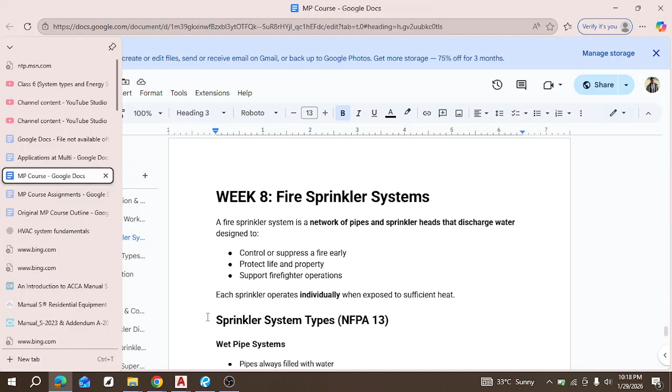Right, this week we will be talking about fire sprinkler systems. Right, it's very similar to plumbing systems, but it just has some extra details, very important details. Right, and it's to be able to effectively fight against fire.

Right. So a fire sprinkler system is a network of pipes and sprinkler heads, right, that discharge water to control or suppress a fire, and that in turn protects life and property, and then it also supports firefighter operations, and it's usually automatic, right? So each sprinkler operates individually when exposed to sufficient heat.

So the way it works is that if one of the sprinklers senses heat, it turns on, right? So it doesn't turn on every sprinkler in the network, just that one. Only if maybe the fire spreads or the source of heat spreads, then it turns on more that are in that proximity, right?

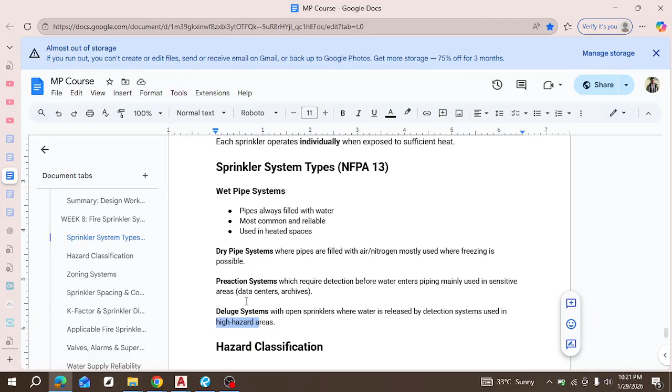So now let's talk about hazard classifications. Hazard basically refers to the possibility of fire outbreak and the amount of fuel. You know that for fire to take place, there needs to be oxygen, source of fuel, and heat, right? So any space or building or occupancy that has these things, either one of them or all of them in a large quantity, and also possibilities of ignition, is referred to as a high hazard zone, right?

So they are classified into three. These are the three basic ones. There are more, but these are the ones we'll talk about, right? So light hazard is basically like offices, classrooms, very basic, the least possible, maybe homes, right? And you need to classify them because they have varying details when it comes to designing their systems, right?

So the max area for this one is 225 square feet or 15 by 15 feet, right? They are saying it as though it's a square, but I like to look at it as a circle, right? Although it can be either, I like to look at it as a circle because when a sprinkler goes off, it goes in like a radius, like a circle, right?

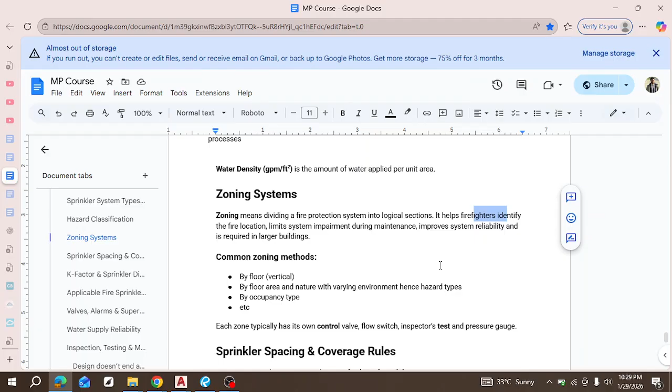So the pinpointing takes place here: if there's a fire on one floor, it's easier to pinpoint it on that floor, right? Because the sprinkler system would have activated for only that place. Then also by floor area. So as you saw here too, all this has to do with floor area, right? And not just floor area, but the nature of that space, of that building, and how it varies and how that influences the environment within that space. And all of these basically contribute to

different hazard types. So hazard type is another reason why you should zone, right? For example, in a building you have a chemical lab. In that same building you have a gymnasium. In that same building you have a theater or a cinema, right? You realize that these are different types of zones. One of them has a lot of people crowded in a place. One has chemical material that can cause fire or burn rapidly. You get? Things like this.

Then also by occupancy type, which I just mentioned, right? This has to do with residential, commercial, and the purpose of that space. There are other things, right?

At your discretion as an engineer, you can decide that this place is maybe too big, or these are two different sorts of things, and zone it accordingly. So each zone typically has its own control switch and pressure gauge, and when it has to be tested, it's tested differently too. That is another importance of zoning.

I mean, don't zone when you don't have to. It's not as if you should always zone. You zone when it's necessary. So one advantage is that it helps to pinpoint. You can test each system individually, and if any one is faulty, you can adjust, make changes or repair in that smaller section, rather than when it's one large system and you can't really trace.

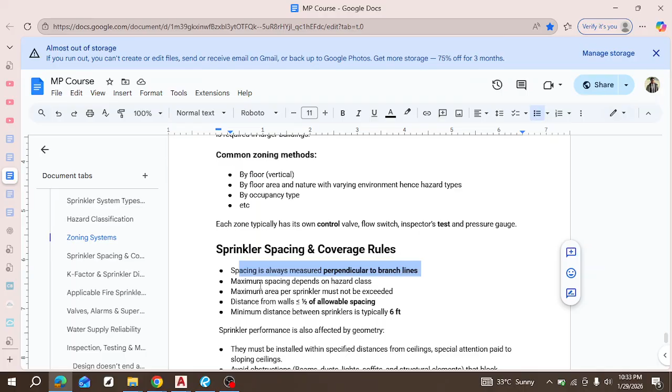Next, the maximum spacing. This depends on the hazard class, as we mentioned. Next is the maximum area, which also depends on the hazard class. And it must not be exceeded, because if it's exceeded, there are going to be blind spots or areas that the sprinklers don't get to. And you understand how that can be a safety hazard.

Next, the distance from the wall. When you're in the middle of a space, you have the radius stretching out in all directions, but when you get close to a wall, it's no longer in all directions. Now you have a wall that is an obstruction, or the end of that place. So the distance from the wall should be about half the normal spacing.

Moving on, sprinkler performance is also affected by geometry. It's not just the spacing and the coverage area, it's also geometry, in the sense that sprinklers are mostly installed on ceilings, but there are also wall sprinklers installed on a vertical wall. These come with different design criteria. Special attention is paid, for example, when dealing with sloping ceilings, so check the code and get that information.

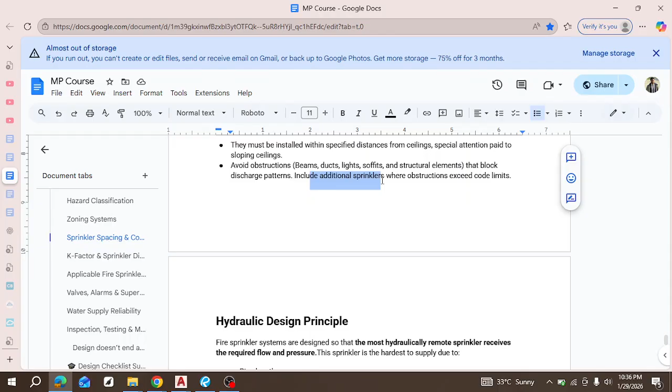Okay, and then when the need arises, you're going to add additional sprinklers to make up for that obstruction, right? So now let's talk about hydraulic design. This basically refers to how the sprinkler systems are designed so that the most hydraulically remote sprinkler receives the correct flow and pressure, the required minimum, right?

Just like how we spoke about pressure drop in pipes or in ducts, right? The farther the water travels, the more the ability to put out fire drops: the pressure, the flow, everything drops to almost static, right? So that's why this is important. And the most hydraulically remote sprinkler is the one that's affected most by that pressure drop and that distance.

And you see that it's not just those two, there are a lot of factors that play a role in affecting its performance: the length, the size, very important, the fittings cause pressure loss because of changing direction and changing section area. Then elevation too, when it has to go vertically upward, it loses pressure and velocity too, so you need to make up for it, right.

Then friction losses too, depending on the pipe material you've chosen. If you're able to get the smoothest pipe possible, that is usually the best, although in some cases it might not meet the structural strength required. But it's something you need to put into consideration; that is why this hydraulic design is important. These calculations verify that the water supply can meet the total system demand. So I spoke about the materials. These are some commonly used pipe materials when designing sprinkler systems, right?

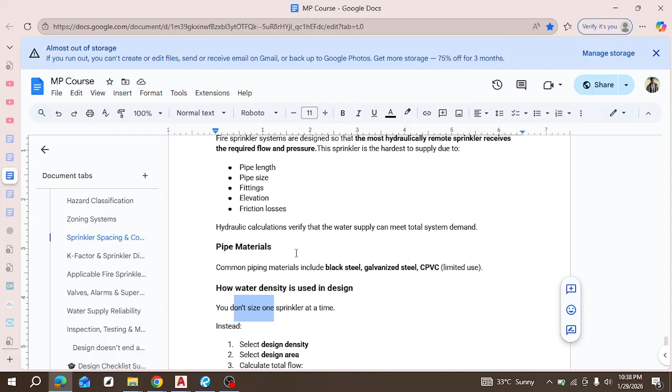So now moving on, how water density is used in design. We spoke about water density, which is the amount of water per area, right? And we'll also talk about how you don't size one sprinkler at a time. As we spoke about here, the most hydraulically remote sprinkler, you don't just use one. This whole calculation is to ensure that the building is sufficiently protected. So you will not just use the last one.

Besides, sometimes that last one you're selecting, that you think is the most hydraulically remote based on just looking at it, might not be, right? So that's why you need to expand the area. That's where the area comes into place. It's not just one, you look at an area. So now you select the density based on the hazard level of that space. Then the design area usually is around 1,500 and above to 2,500 square feet, right? This is usually for the lowest hazard level, and it increases with hazard levels.

So if the most remote, this hydraulically remote 1,500 square feet area is covered, if you design for that place to function properly, it means the rest of the sprinkler system will work, right? Then to get the total flow, this total flow is just the amount of GPM that we are sending into that space, so you multiply it and get it.

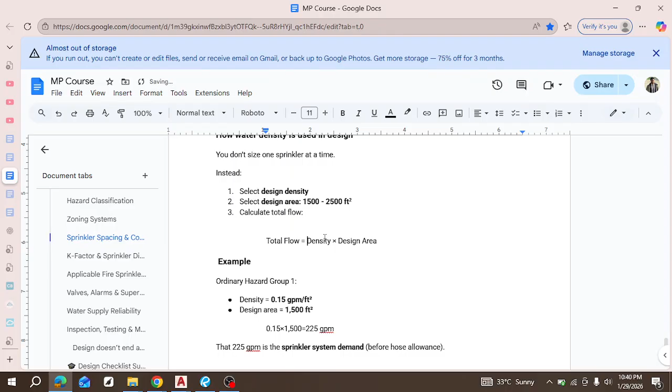So an example is when we have a density, remember this is for hazard group 1, and this is what the density is, and then this is the design area, which is kind of fixed for lower hazard levels, right? But we may not always get buildings as large as 1,500 square feet; there are always smaller buildings. But the whole point of understanding this is just knowing that that section is covered.

So then you do your calculations. This is just an average example of what it looks like when you have a very large building, because the larger the building, the more these things matter, right? But in a case where the building is not that large, you can select what you think works based on your own discretion.

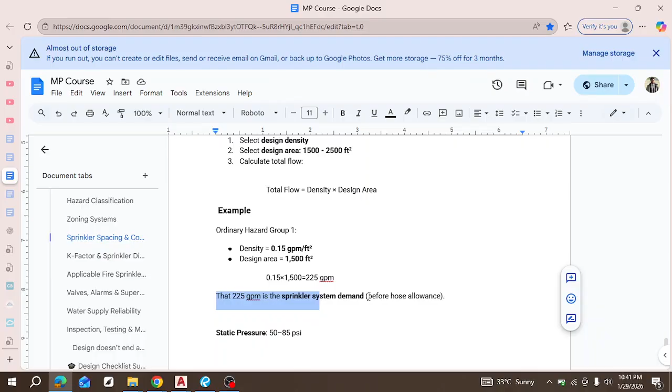Now there's also another thing we talk about. So this is the flow, the system demand, separate from hose allowance. We'll talk about hose allowance shortly, but before we do that, let's talk about the pressure levels. Typical pressure levels are usually around 50 to 85 psi, right?

PSI, right? Then the flow, basic flow, is usually around 200 to 1250 GPM or more, but this is the very average range. So you see here we got 225 GPM for this, right? You could use less, but to be on the safe side, use a minimum of 200 GPM, right?

Now let's talk about that hose stream allowance we talked about earlier. This hose stream allowance is like supplementing the system or flow you've selected. Let's read it here. In addition to sprinkler demand, which you've selected as 225, hose allowance, which is around 100 to 500 depending on the hazard, with 100 being the lowest and 500 being higher, is added to ensure that water is available for manual firefighting operations. Basically, it's meant to supplement the system, right?

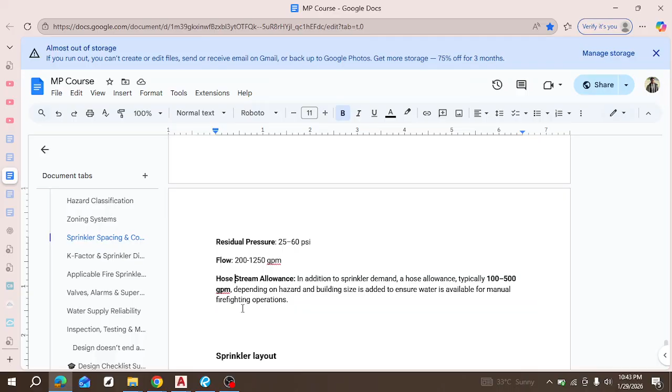So now let's talk about sprinkler layout. There are two major types, which are tree systems and grid systems. Let's look at what they are before we talk about some details. Tree, as you see, is just a major distribution pipe, and then you have branches off of it. This is the simplest way to lay out your sprinkler pipes.

But there's a bit of a problem, in the sense that as you travel down this pipe, pressure and flow drop, right? Flow, like volume, drops. Flow and velocity tend to be confusing sometimes, but it's flow and pressure, and when I say pressure, I'm talking about static pressure, right?

You see that at the beginning of this pipe, the flow and pressure are the highest, but as you go towards the end, it drops. That means the sprinklers farthest away are going to receive the least action, and these are the hydraulically remote ones too. Usually this is what your hydraulically remote area looks like. For simpler, smaller buildings, this works because maybe you just stop somewhere here, two sprinklers to the left, two to the right. The difference is not much.

But when you are talking about bigger spaces or bigger buildings, we switch over to using either the loop or the grid method. One thing that stands out in these two methods is that instead of one major pipe, we have two. When the main supply comes in, it splits into two first, so that as it gets into the sprinklers, you are getting supplementing water from both sides. Now you just have to concentrate on adding enough flow and pressure, which is going to be distributed properly, as opposed to this one where majority will be around here and then this one suffers.

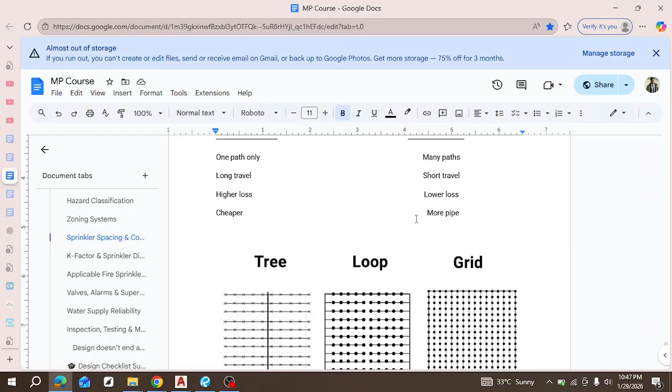Then this is cheaper to do. It's very simple to design, but this not only requires more pipe, but it also requires more technical know-how, right? So most times you're going to be building either this or this, right? Moving on, and this applies most times, like I said, in larger building spaces, right?

So let's talk about K factor. Now we've talked about the pipes, the arrangement, the spacing. Now let's talk about the sprinkler itself, right? This sprinkler has a K factor, right? This K factor relates to the pressure and flow, right? And larger K factors basically means delivering more water, right? So you are seeing here that these are the different common values, right?

And you see that when it's smaller, it's less water but higher pressure. Now when it's larger, it's more water but lower pressure. It just basically means that this one has larger openings. But this K factor is not just a function of the size, right? It's a function of both flow and pressure, right? So at the end of the day, that is like a constant based on that particular sprinkler, right?

And I see that some common values selected are 5.6, 8.0, up to this for larger sprinklers or larger openings. And then you have even this one, which means early suppression fast response, right? This one is rare, but basically why you have changing values is because when you do your hydraulic calculation, there are a lot of factors that can make your system not perform properly, right?

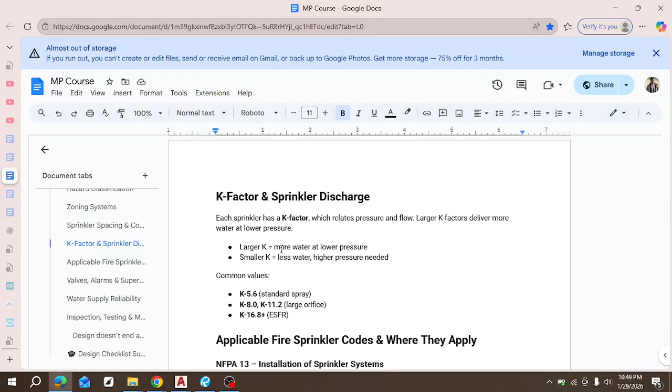So now let's talk about some codes, right? So applicable codes, the one we've referenced a lot is NFPA 13, right? It basically talks about how the sprinklers should be installed, the rules, the details and all of that, the primary code to follow, right? And it applies to commercial and industrial. It also applies to residential, unless excluded, which is a special case, right?

It also applies to new construction and major alterations, right? This basically means that if you're installing in a building that's older, this may allow you some little lapses. It covers all these things that we've already spoken of. Now let's talk about another one, which is referred to as 13R. This one focuses on low-rise residential, buildings up to 4 stories, like apartments, hotels, dormitories, right?

So there are some buildings that fall into both these categories, right? So you just select the most efficient way. There's not much difference in designing; they are not so far apart. It's just that this is the primary code to use when your building falls into this category, right? Then there's also this one, for one or two family homes, right?

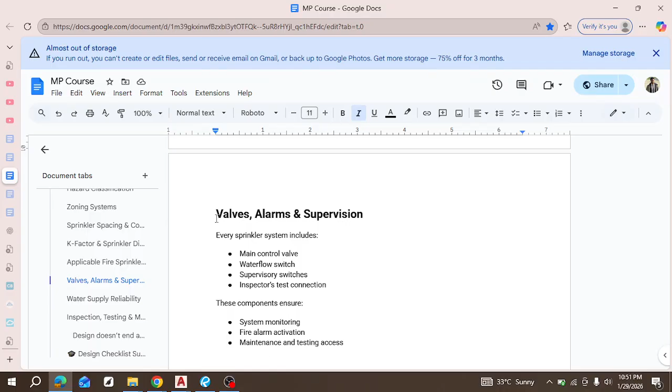So IBC basically tells you this building needs sprinklers, while NFPA 13 tells you how to design them, right? So it gives you more details. Now all this part just refers to extra information. I'm not going to dwell on this part so much, so you just need to do your personal research on it. All this is just extra information on sprinkler design, right?

So the details, you may not always put these things on your design, right? That's why I'm not going to dwell on them, but you will need to include them in notes, to ensure that these designs are followed and that they follow the code too. So you see the components that you need to add, and then you see why you need to add them. Next, let's talk about water supply reliability.

Now, just like in regular plumbing water supply systems, most of them get it from the municipal water supply, which is the city's network of water supply. In regular plumbing systems, the pressure and flow impact maybe just convenience and comfort. But in fire systems, this can influence whether that system performs well or not, and that has a higher risk factor. That's why you also need to do your hydraulic calculations, and if it doesn't meet criteria, you may need to recommend or install fire pumps.

Another reason why you may need to install fire pumps is if they are supplying from a well, or not the general system, because the municipal supply has its own pressure levels too. So if for any reason the pressure of the supply water doesn't meet your criteria, remember we talked about residual pressure and static pressure, and the system is not performing like you put in your calculation, you now need to increase that pressure, and that basically just means adding pumps or tanks to supplement the water supply.

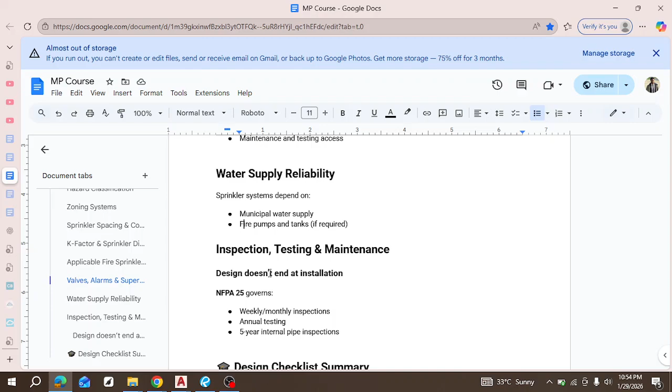Now, this also is inspection, testing, and maintenance. Just like these parts where you have to add notes for them, this is also about notes. Even this water supply reliability, if for any reason you discover that it is not, you add these notes. Why do you add this note? So that whoever is building on site, the contractor, the building engineer on site, is able, by their own discretion and by the information you provide them, to make informed decisions on what to do and why. So things like how often the place should be tested, how often it should be maintained, inspection and all of that.

So now this is what our checklist looks like for designing a proper fire sprinkler system, so let's get into that real quick. Let's design the system for a building. Okay, so this is a building that we've designed. It's a small building, so that we don't spend too much time. Let's design fire sprinklers for this building. So what's our first step? First step is to determine the hazard.

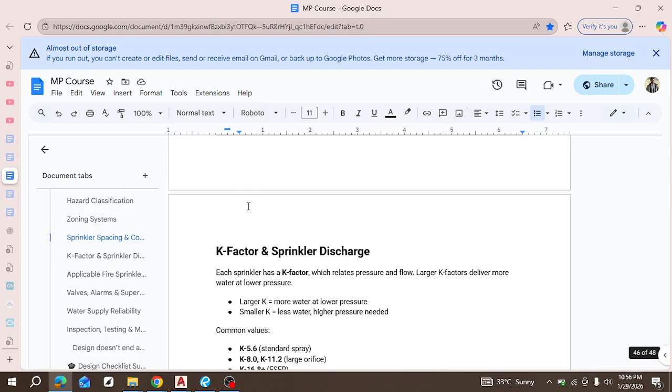So this is a retail space, right? So that tells us that it is ordinary hazard 1. It's a small space, ordinary hazard 1. So that also means it has a spacing of 12 by 12 and a water density of 0.15, meaning that it is hazard level 1, not 2. Okay, so we've done that.

Now we're selecting the appropriate sprinkler system type, which is the wet pipe sprinkler. So that's what we are designing for. Now ensure proper spacing and operation control. We're going to use 12 by 12, which is a circle, a coverage area of 12 diameter, which is 6 in radius. So I'm just going to draw something here. This is going to indicate my sprinkler. Now I want it to cover an area of 6 by 6.

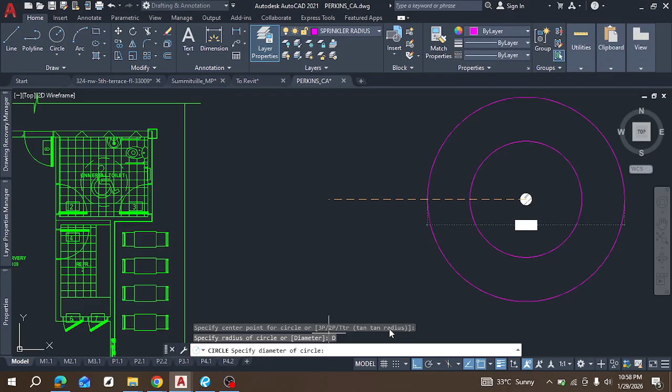I've already created a layer for that. Oh shit. Okay, which is this. Let me go over to this layer. So how I got here was that I simply drew a circle around this, and this is where I specify my diameter. So my diameter will be 12 feet. Enter. This is how we got this circle.

So now we're going to take this and arrange it across this building with this on. I'll also explain to you why I had to put it in a different layer. So use this that can move around. So you see the coverage area. Oh, I should have copied it, not moved it. So copy, hold the center, and then put it

one here, right? And aesthetics is also important. So I'm going to put it in a straight line so that we don't just have it scattered anyhow. Let's do a straight line. Okay, straight line.

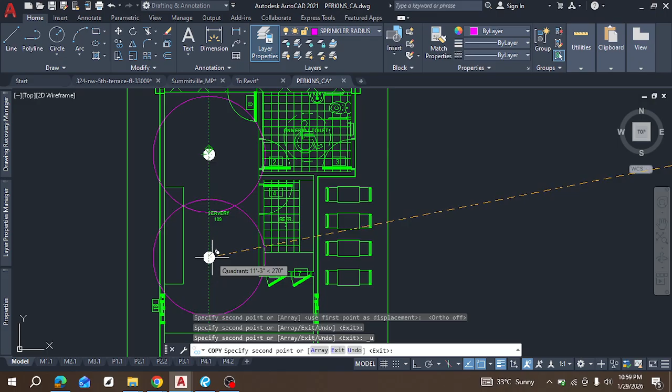Why I can have these lines I can trace across this green line is because of these snaps on these two things. Those two buttons help to maintain this straight line, right? Okay, I don't want to move it too far away, right? So now we still have some blind spots, but we can't help it in this case, right?

Then we have two more here. Okay, I'll be able to help it very soon. I've seen a bit of change I can make. So this one will be somewhere here, and this one will be somewhere here. Right, so now if you see in this space, I have no blind spot in this area. Okay, just this small space, right?

So now because of these two that are here, I can just move this one up and cover up a bit of this space. So you can't avoid blind spots, but you can try to avoid them as much as possible. So if I move this up, I'll be able to make use of this space and a bit of space from here, right? Move up a little.

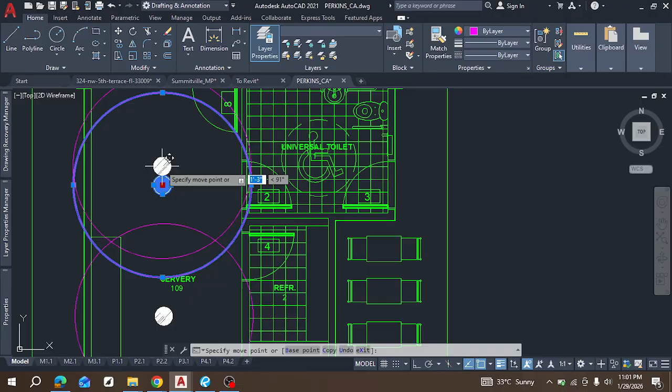So by doing that now, you see that I've used up that space and I've closed up these small spaces, right? Then I can even move this one up a little too. Okay, move this up a little. Now remember that this, okay, but you can just find a balance, right? Okay, so this way we have smaller spaces here now.

So now, why I put this in a different layer is so that I can turn off that layer, right? I can move to this layer and then turn off that layer, just make it not visible, to reduce clutter. Right, so now I'm sure that each of these sprinklers covers the radius it's supposed to cover. Okay, let me turn it back on and explain something.

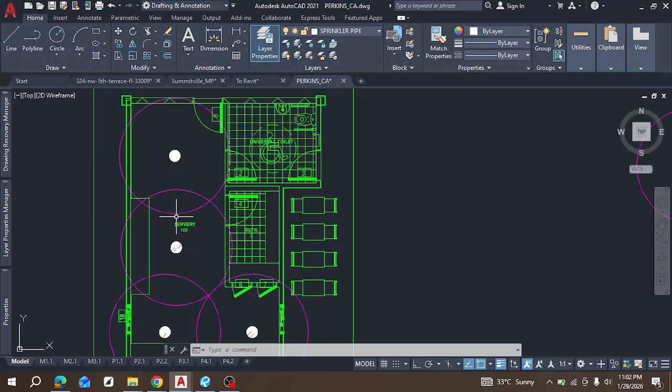So now remember that we have a 12 by 12 distance maximum, right? So being that this radius is 6, and the entire diameter is 12, that already means that by the time you measure from here to here is 6, and here to here, it's already so close, so there's no way this is going to exceed that 12, right? Same thing for here. So you just have that range. Now let's turn it off and move on.

Okay, so what are we doing next? Applying correct density and design. Okay, that will be later. So now this is what our design looks like. So we lay out our pipes. We're already in the sprinkler pipe layer. If you notice, I like to have a lot of layers. It's better to have more than necessary, right?

And then for things like this, being that the water supply is going to come in from one of the sides of the building, I like to select a part that is not at the front of the building, especially in a commercial space. So I'm going to select somewhere here, because this is where people, customers, are likely going to be interacting. So I'm going to select one that comes from here. So I'll simply draw my line.

Now let's talk about that branch, that grid and tree system, right? Now this is a little design characteristic that helps you design better. I could have taken my line and drawn it somewhere. Okay, turn this back on, that's easier to trace. Over it and then drag it and draw it across like this.

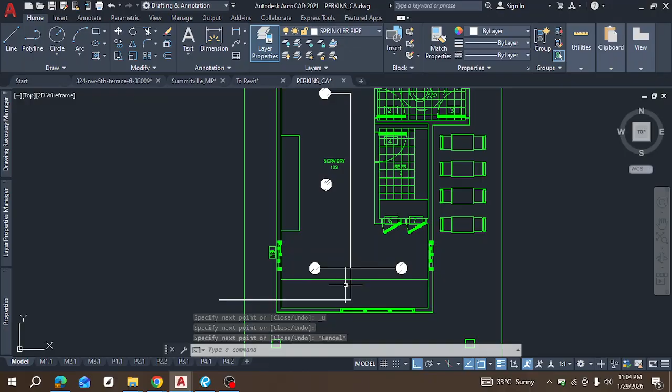I'm going to try to do it in such a way that it is shared. So I come in around the middle instead of at one point, right? Okay, interesting. So this way, as the thing comes in here, it splits into the two almost equally, and then continues its journey. Gets here and then continues its journey, right? So at the end of the day, this is what our design looks like.

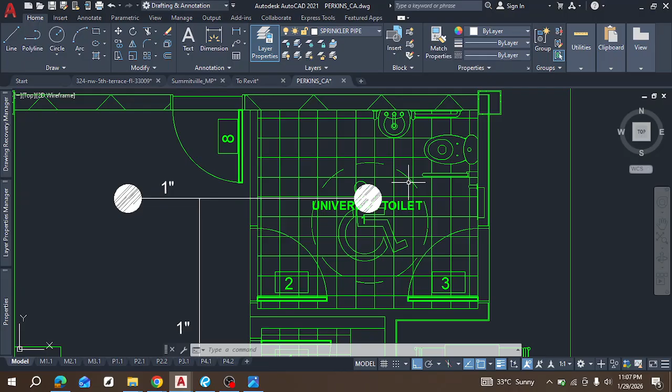So in our own, we are working with an ordinary hazard 1, which is this first column. How many sprinklers do we have? Oh yes, we have 1, 2, 3, 4, 5. There's an area requirement for sprinklers in a bathroom. It's quite funny to put sprinklers in a bathroom, because what could possibly catch fire there? But there's an area limit, a minimum area where you need to add sprinklers. This one met it at about 55 square feet. That's why we have this here. So we have 5 sprinklers on plan, so we'll go with 5.

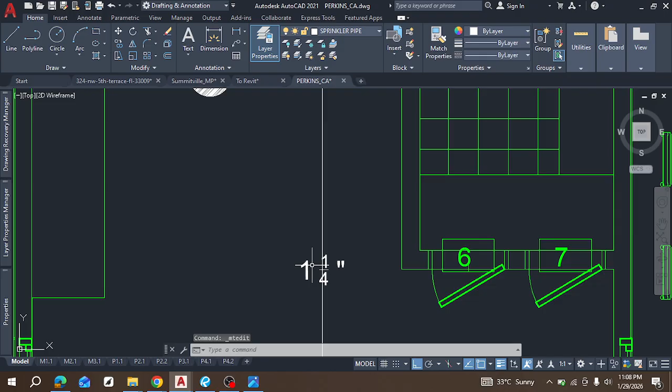So it means our largest pipe is going to be one and a half. And then as it goes up, it reduces. And that's what you see here too. So it's one and a half, and then as it goes, supply. This one is just 1 because it's one sprinkler supplying. Then this one should be 1 1/4 because it's supplying 3 sprinklers. And then this one is just 1. This is supplying 2. So let's confirm: 2 sprinklers is still 1 inch. Okay. Then this is also 1.

So the importance of this is it enables any person interpreting your design to tell the size to use and to ensure that you maintain the required flow and pressure. So now this is the layout. It's very nice to look at. So we're going to import this into our sprinkler software, because we also need to lay out the actual pipes, look at it at a 3D level, and then do our hydraulic calculations. Which software are we using? The AutoSPRINK software.

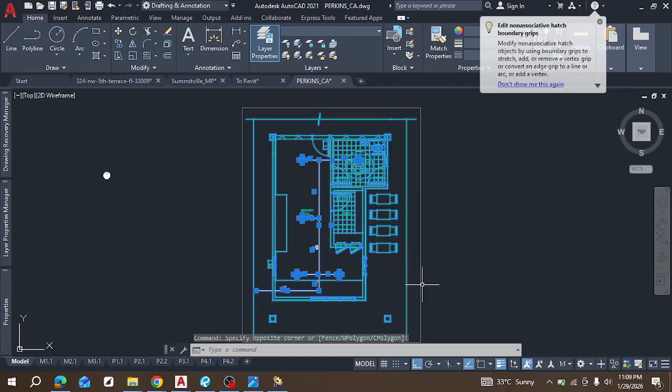While we wait for it to open, we are going to copy out this, because we have a lot of information on this page. But we need just this on a page, so that is the only file we're going to import, so that we don't have too much clutter, because if there are multiple elements on the page, it slows down the software. So I've created a CAD file for just this. This is the file we're going to use.

The sprinkler app has opened. So let's start a new drawing. Something with this software is that it tends to close a lot, so we need to be saving our work as we go. Okay, perfect. Right now it's empty. So this is where we go and import the file. Is it here? Import, yes.

Is it here? Import AutoCAD, yes. So we import our file. I named it AutoSprink because I want it. Oh, what does this mean? Oh, I think it's because it's open. Let's see.

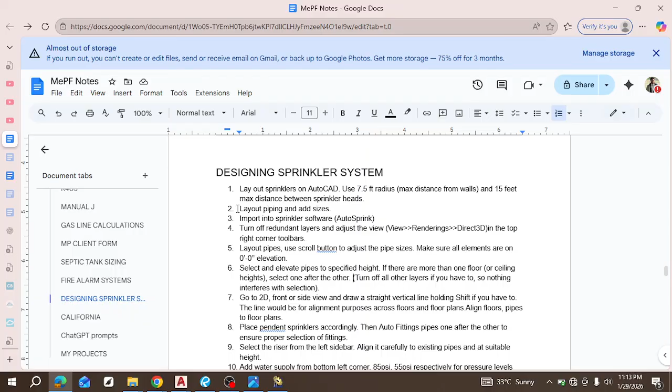So now I have a checklist to help me design better in this software, because there's a lot of wahala that the software can give you, right? So let's go to my checklist. Okay, we've already done some of these, right? So we lay out our sprinklers, use these radii for light hazard, then lay out and add sizes, which we've done. Import into sprinkler software, this is where we're at, right?

Now turn off all redundant layers, because there's a lot of layers. All those layers added in AutoCAD are showing here, right? So now we turn off the ones that we don't need. Okay, we need that one. This one we don't need, right? So when you turn it off, you check whether it's necessary. Okay, this one we don't need. We don't need this one.

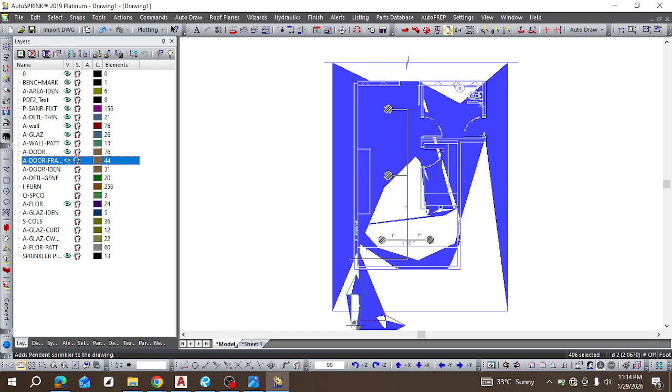This is for furniture. We don't need it. We need this to be as light as possible, so we don't need that. Okay, doors. You see, this is another issue. So at this point there's this view. Okay, change it to direct 3D. This also preserves those changes, how it appears, right?

So we need our doors, because we need the building to look as close to an actual building as possible. Okay, this one can stay. This one will stay. This one should stay. This one can go. This one will stay. This one will stay. Not going to be much of a challenge, right? So now this is lighter, and it tends to improve performance while designing, right?

So we do that, and then adjust the view. We just did that, right? We went to the renderings and changed it to Direct3D. It helps to preserve just the details we need. So now we lay out the actual pipes and then adjust the sizes accordingly, and make sure they are on the 0 elevation, right? The sprinkler pipes are going to be elevated to the ceiling, but before we do that, we need to ensure that they are laid out on the floor before lifting them up.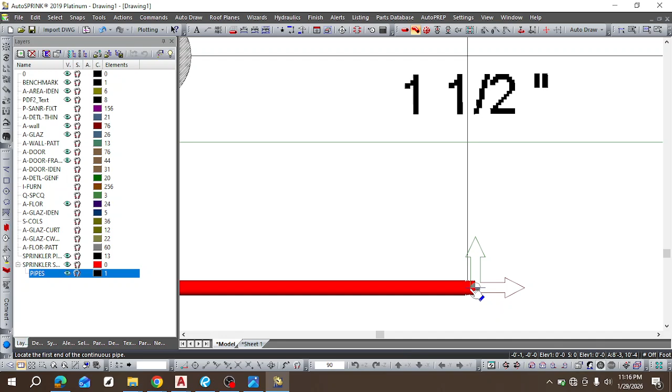So this is our pipe. You just click and draw it, then hold your shift to ensure straight lines, right? This is another importance of drawing it before bringing it here, so that you can draw the pipe. And also at every junction you do a separate pipe, because that junction is where I'm going to add fittings, right? So hold shift, somewhere here.

Another thing is you have to keep checking the pipe, see that the elevation is correct. If for any reason the elevation is not correct, you need to make adjustments. So this means they are laid flat on the ground. And this is our pipe size. So how do we change that? Double click and then edit your pipe size here to 1.5. Press enter. It has reduced. The default is usually 2, but you can change that. No, that's not it. We need 1.5.

And then you can also make other changes to your pipes if you need to, the material and all that, but that's not what we are here for. Then this one is going to be 1 inch diameter. Press enter. You see how it's taking shape. So now we continue. There are two types of pipe. This is just one pipe at a time, and this is a continuous pipe. So which one do you think we need?

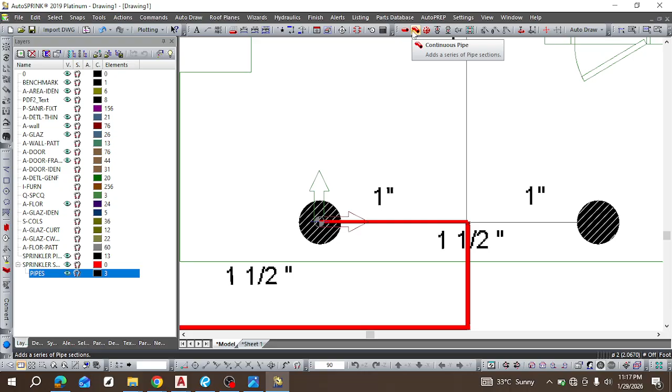Let's go with this. So we take it from where this is, then hold your shift and drop it here. That's around where the sprinkler is going to be, right? So double click. I'm sure there's a shorter way to adjust these pipe sizes, but I can't really remember it right now. So let's move on. Now let's use this continuous pipe and see what it does.

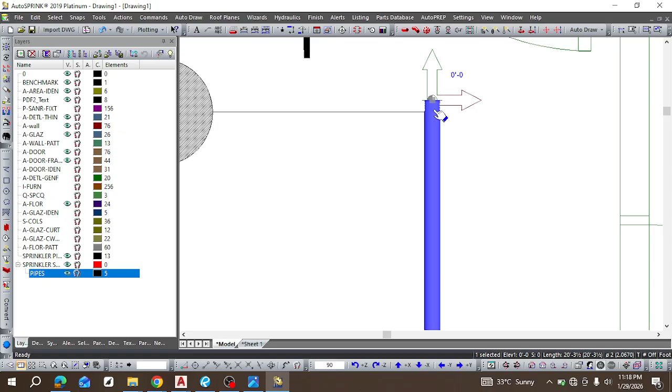So now from here, this one is 1 inch up to, oh, okay, I mistakenly left out something here. I didn't import the right... let me see if I can, okay, I can adjust this a little. I want it to be here. Okay, what are we doing now?

Okay, what do we need? Okay, add another pipe. So I mistakenly imported the wrong pipe, but we'll figure it out since we're already here, right? So we had a pipe somewhere around the center, so that's where we're going to place this. So we drew another pipe finally to this point. Make sure that it aligns as well as possible, right?

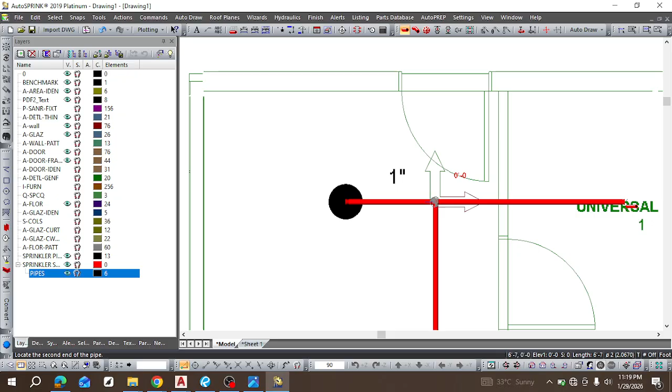Okay, so this one, you hold your shift somewhere in the middle. This is fine. Now let's adjust our pipe size accordingly. Right, so this is 1 inch because it's just one sprinkler supplying, and you can even see the sizes that we put in the file that we sent in. You can see it here. And then this one is supplying 2, so it will be 1 also.

Oh no. Okay. Hold your shift to make sure it doesn't move around. No. Okay.

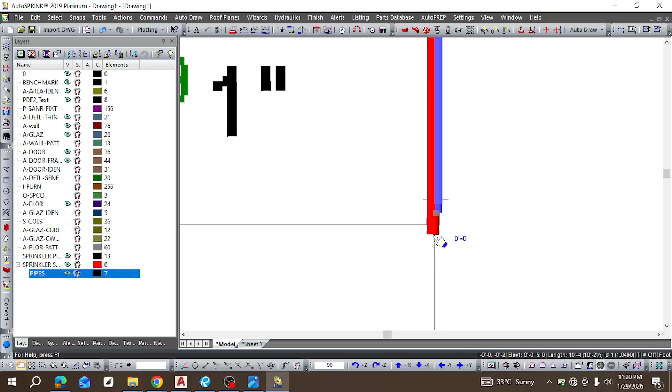Okay. So now this is 1 inch, right? So we come here and put this. We add another pipe. There's a way, I can't remember, there's a way I could change this thing, right? But let's just leave it. So this comes here. It's supposed to be at the center, but this is just a draft. So when we add the actual things, we'll see, right? And then we add another pipe from here to meet it here. Right, so now let's edit these sizes. Enter. Okay. So now we are good to go.

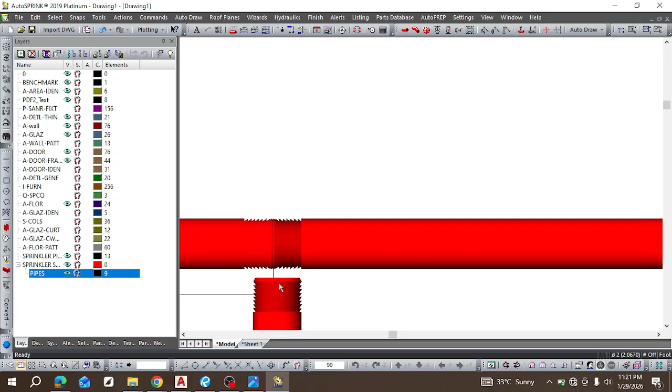Okay, you have to ensure that the pipes are aligned as much as possible, because we'll need to add fittings later, and if they are not aligned, it's going to be a problem because it has to snap accordingly. So let's just ensure that every pipe is aligned. You see, this one is not exactly aligned, so stretch it. This one is not really a problem. There's a pipe, there will be a sprinkler there. So we are good to go. Each of them is an individual pipe. This one looks like it's not aligned, but let's hope it is, because we need to add fittings soon.

So next on our list is: select and elevate pipes to specified height. If there is more than one floor or ceiling height, you select them one after the other. So now you've seen cases where we've designed for multiple floors, right? Where you just put them beside each other. So for example, this is our Summitville work we did one time, right? Oh shit, that's not what I wanted. Okay, let's use this.

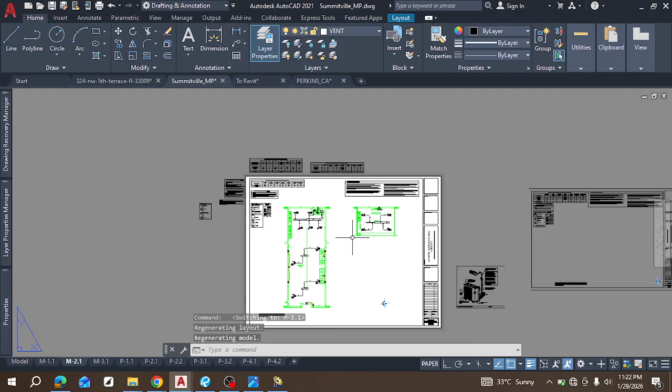You see that in this case you put them beside each other for different floors. So that's also the way you lay it out in this place, and then maybe one here. Then you design the pipes. All of them will be laid on the ground at 0 elevation. Then you can elevate it. So now let's elevate this one to the right height. To do this, turn off other layers if you have to, so nothing interferes.

Okay, I want to select everything, so I want to turn off everything else that I don't need, because they're going to affect me. This is about major pipes. You can turn this one off. Okay, no, we need that. I made a mistake. We need this. This is those lines that are there, and then the sprinkler circles too. I can turn off a lot of these things, so I don't want them to interfere. Normally I can easily select them one after the other, but I want to just select them all at once.

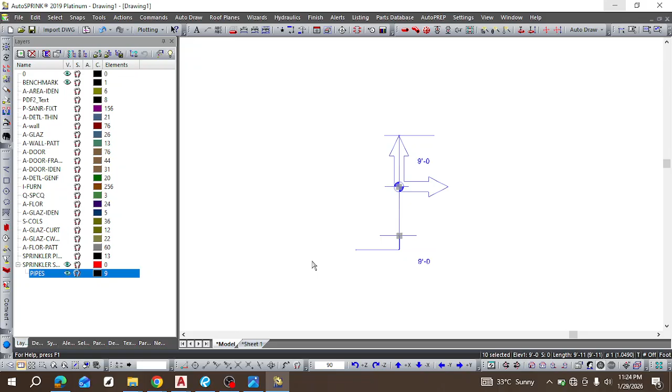Okay, so you are left with just this. There's nothing to interfere with it. So now select everything at once. It's now in blue. Right click and elevate pipes, and then I'll select the height I want to elevate it to, which is 9 feet, because that's our ceiling level. Okay, it's now at 9 feet. You see that this indicates 9 feet. Another way to look at it is to change the view, right? Okay, we can't see it just yet.

So let me show you what it looks like. Now you see that this one is on the ground floor, right? On the ground level. Okay, we don't need this. We need walls. We don't need furniture. Okay, we need doors. So now let's turn some of these things back on. So you can see now that they are at a distance below our 9 feet. Okay.

Okay. What else do we need to turn on? No, don't need this. Don't need this. What else do we need? Let's go back. Let's change view again and see what it looks like. So yeah, see that when you look at it on a plan view, everything seems to be on the same level. Where's that door? Okay, this is the door. Right, so we want to turn everything back on. Okay, we are good now.

So now these are all our spaces. So far so good. Okay, we don't need these sprinklers, because those are just lookalikes, figureheads for our actual sprinklers, right? So what are we doing next? We've done this. So you go to 2D front or side view. I usually use the line for alignment purposes, when I have multiple floors and I need to align them.

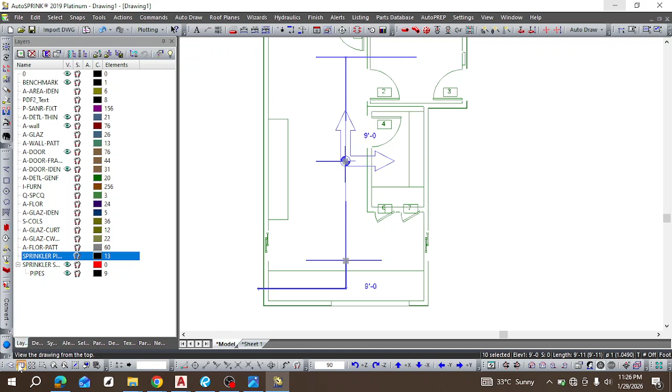So what I do is, these are the different views. This is the ground level, this is the 9 feet, right? So now I'll just go here. Let's start here. This is where it meets the wall. So likely the pipe that comes up is going to be somewhere here, hidden in the wall rather than running along the surface. So I want to use a line. Draw this line at this point.

I start by drawing the line and then I change my view. So now the line was drawn on this point. Now I'll hold my shift to keep it vertical and bring it up here. Now look at it from this view. This is my line. If for any reason I had to put multiple floors on top of each other, I'll simply draw this line on each of the different floor plans, and then align them together above each other.

So now you have this sprinkler level. You have another one maybe about 17 feet above ground, another one maybe 32 feet above, right? So what are we doing next? Plan through a straight vertical line if you have to. That's what we just did; we may not need it, but let it be there. Now we place sprinklers accordingly. There are different types of sprinklers, but we're going to use pendant, one of the commonly used sprinklers. So we place pendant sprinklers.

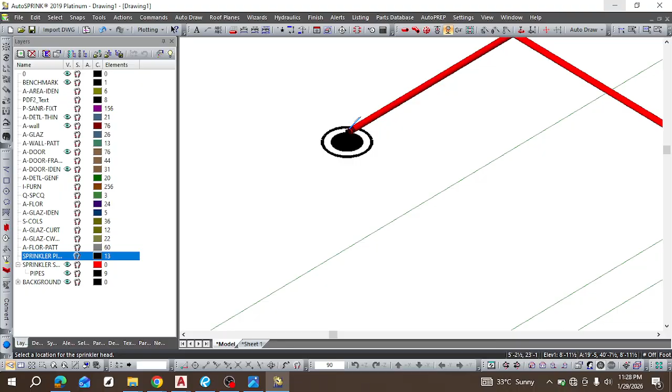So let's do that, at this level. This is where we select our sprinklers. These are different types available: we have upright, pendant, sidewall, but I want to use pendant. So I go back and place them where I need them to be. If I place it here, it might mistake it and place it on the ground. I want it to be clear. I want to place it here.

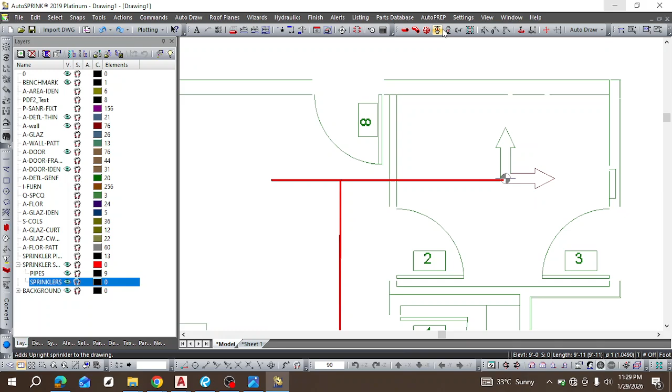Then, this is not very accurate. See, it's not exactly where I want it to be. Let me Control Z it a little. Let me place it on this. I'm sure it's going to snap to the point, because it's going to identify just to place it here.

So now what I'm going to do is I'm going to select. Now this auto fitting is just going to add all the fittings to join the pipes and sprinklers together. So I'll right click on the pipe and select auto fittings. So now you see that has added the fitting here. So that has joined this pipe with this one. And it's also capped this point because it doesn't like open spaces or open pipes. So now I select this and auto fit again. Now it is telling me selection and then okay.

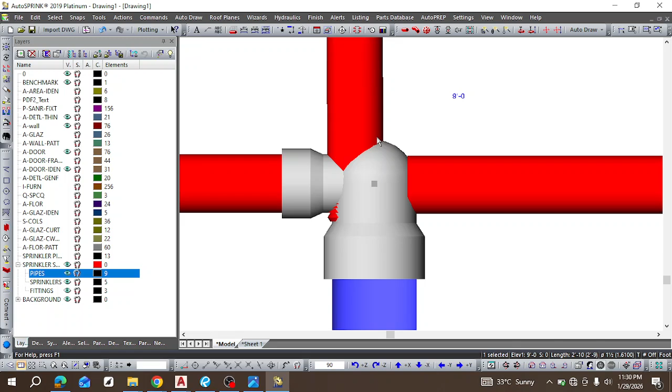You see, this is what happens when the pipes are not properly aligned to each other. Right. So I'm going to select and delete this. I knew that this might be a problem. Right. So I'm just going to ensure that we place them right, so that they snap to the right spot, so that when you auto fit them, it's okay. Still not quite correct.

See, okay. We need to ensure this. It can be very sensitive, right? I mean, okay. So bring this to meet here, and then bring this to meet. Just try and align it as well as possible, right? And bring this. Okay, let me bring it up here so we can test for sure why it did not work before. Let's do it again.

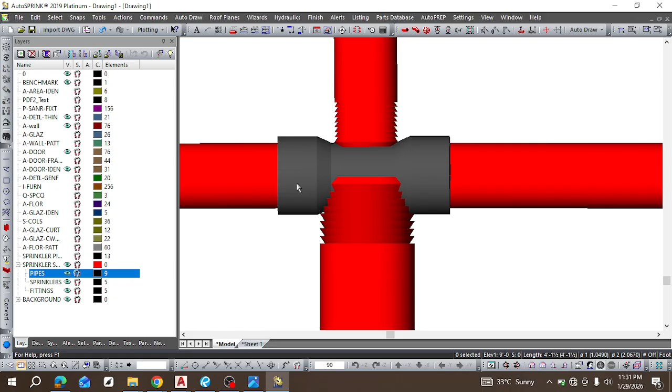Okay. See how it can be a problem. So let's keep trying till we get it right. So in this case, now it only recognizes these two as being together, so not this one. So delete that because we want them all to be together, right? So that means those two are rightly placed. No. Oh. Okay. You don't want to move. So I just have to place this one so that it.

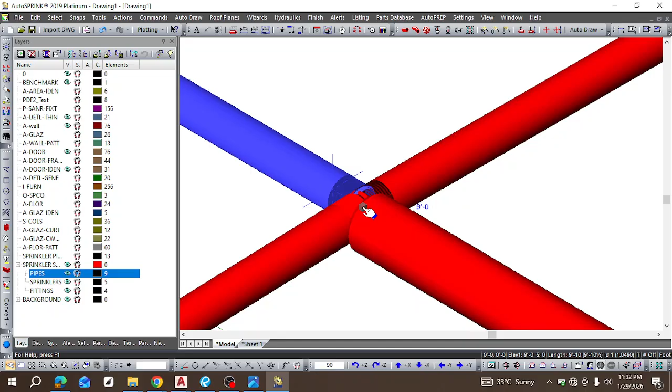Right. I also want to look at it from other angles, other POVs, right? Okay. This also helps. Okay. It can get very frustrating if you're not getting it right, right? You just have to ensure that it aligns, right? I think this view is better for it. Okay, can put this one.

Okay, I hope it works now. Let's try again. Might not work. Let's just try and see auto fitting. Oh, still not working. Okay, let's try using this one. Still not working. Okay, let's keep trying. Okay. I'm just confirming the size of the pipe. Yeah.

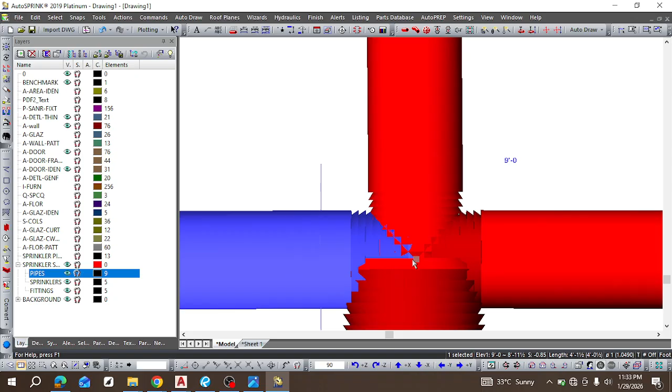And this usually stems from when you don't align it from the start. So it's not usually good to be in a hurry, right? You may have to start this afresh because if this doesn't work, we can't go further. Right? You see, in places where it worked, you can see, oh, this is another issue where it did not work. We have to start this work afresh. Let's just go over it again.

Okay, so we've gotten it right now. Right, this is the kind of fitting we're looking for. So we do that and then select for all. I also see that it also ensures that you're able to add. Now it connects such that the sprinkler is also connected to this, right?

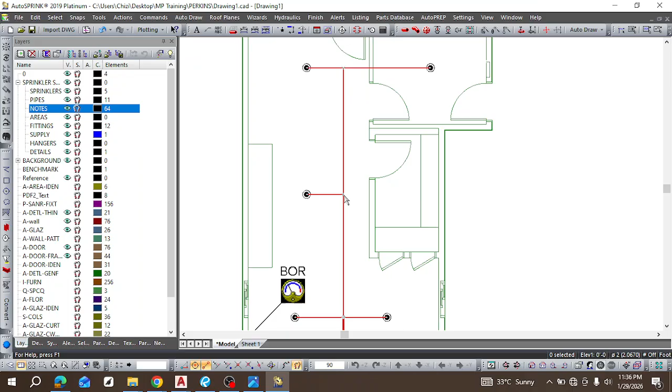So the way to ensure that this works is that right from the start, when you are laying out your sprinklers on the ground, those lines that you brought in from AutoCAD, ensure that you draw them to snap to the correct junctions, like where this meets this. Let it meet at that point. When you're drawing, you will see that it shows up for you to click, right? It shows green so you know that it has hit that point.

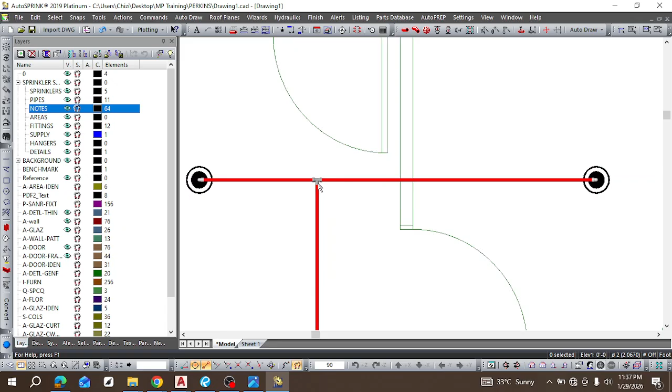So let's do that quickly. So now it just ensures that you get that right. That is the whole point of getting things right early enough. If not, you move on and then it becomes a problem later, right? So after adding the sprinklers, we've now done the auto fittings. Now we select the riser from the left sidebar. I already added the riser here, but let me delete it and add it back so you can see how it's done.

So this is the riser already. So let's select it and then delete it. Okay. Now we don't need this later. Oh, so there was a cover. Okay. So how do we get that? We come here. Okay, AutoSPRINK. We look for a riser.

Okay, this is a riser. Now these are the different sizes of riser depending on the size of our system. This is a very small system, so the pipe is even 1.5. In many cases, sprinkler systems are not always designed for whole buildings, right? It's usually for specific hazard types or a specific requirement. So we don't always have large pipe sizes, right?

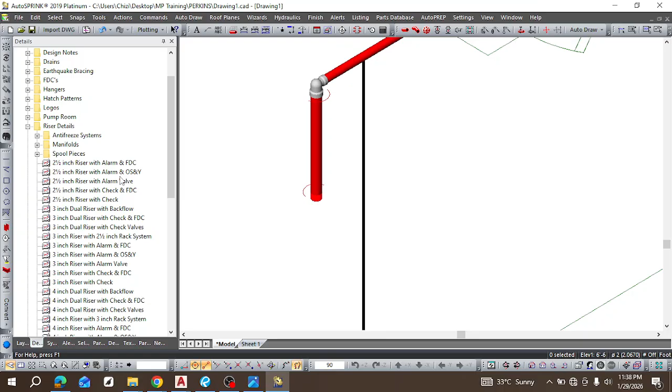So in this case now it's a 1.5, but the smallest here is 2.5, so I don't want to use it, right? There are different ones that go with this 2.5, but let's just go with this first one. So bring it out and drop it. Okay. Now we need to, oh, this is still here. I didn't need this to be here.

So now we need to align this to this thing. I don't need these now, so I can delete them and bring them back later. Right. So now we need to align. Let's align it from this. So this is what the riser looks like. Let me move it so you can see it better. Okay, this is what it looks like, right?

So this is looking like a pressure relief valve, right? The water comes in here. The riser just helps to control how the water flows, right? Then it goes up here and then into the sprinkler system. And this is probably if you need to connect it to an external source or something. And now let's move it, right?

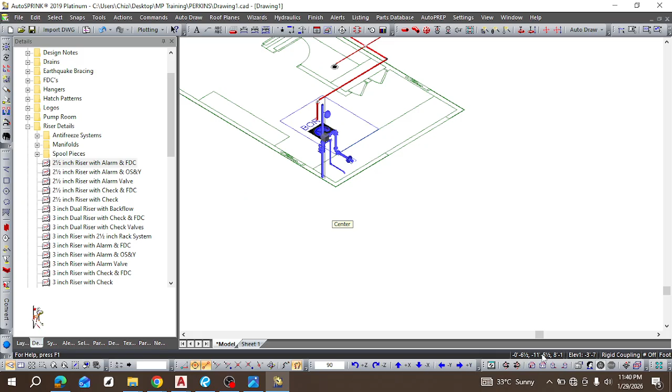Now to align this, you need to know how to align it on all the levels. So first of all, let's align it on this level. What we need is to align this to meet this. Initially we had just this pipe, right? So I have to just add this. Okay, let me just do it now. Delete. So now we come here, draw a pipe. You see it's showing green now, which means it's clicking to the end of that pipe, right?

Oh, that's another thing with 3D view. I want it to be in this view. Okay, perfect. Now you draw a line. That green means it's snapping to the end of that pipe, right? So our pipe is going to be, let's say, 2 inches. But before we do that, let's align this so that it is exactly under here. To get that, we need to go to this view.

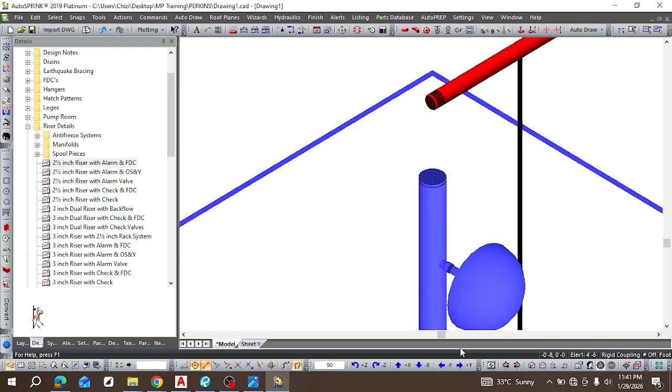Where's our pipe? Okay, let's just go with it. This is the end of our pipe, and this is our riser. So we move our riser until this is directly under. Right, this is the point we need it to be. Confirm from other views. You see from here that it's directly under it. Also check from the side view. It's directly under it. Check another view, directly under it.

Okay, fine. Now another thing we need to check is that this is in the ground, because our water supply is most likely going to come from the ground. So let's check. This is our ground level, right? Okay, it's not exactly reaching the ground because this green line is our ground level, so you can bring it down a little. You press and hold and drag it.

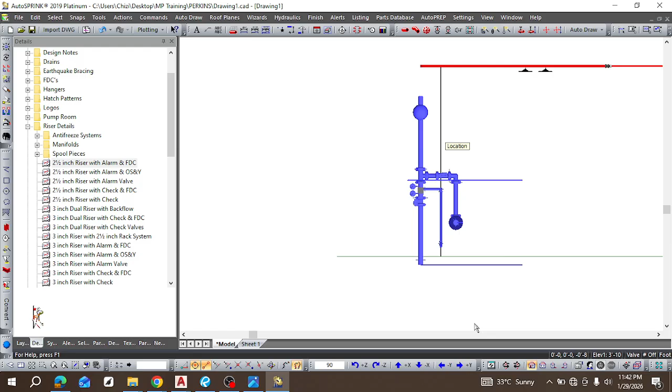No, made a mistake. So just hold it somewhere else. Okay, bring it straight down. Then just confirm that it is still aligned. Okay, yes, it is. So now let's draw that pipe from here down into this point. So now this is our pipe. Yes, perfect.

That green does indicate that it has connected, right? I mean, that is enough because it helps in your hydraulic calculation, but I just like to add these fittings to give it that look. So now it couldn't find a fitting for here, right? That green just means that it has connected, but it couldn't find one because it doesn't have all the possible fitting sizes. Next, we draw a pipe here to show that this is coming from outside.

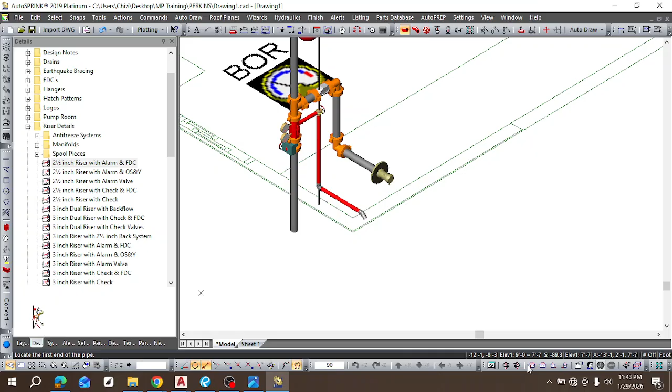These are just some little basic things. Okay, I want to change the view. Let me use this view. All these things matter. I want to use this other view. Okay, let me use this one. These are just playing around with the views to tell you how it works. So basically, I just want to draw a pipe that extends out like this. Now let's look at what it looks like in the 3D view. Perfect, this is exactly what I wanted. So now escape, we don't need that command anymore.

Then select add auto fittings. Okay, perfect. So it has joined accordingly, right? And it has also given a cover here because it doesn't like open pipes. Now what next? We've done all that. We added the riser, which we've just done. We've aligned it to the pipes with the heights and everything, the elevations.

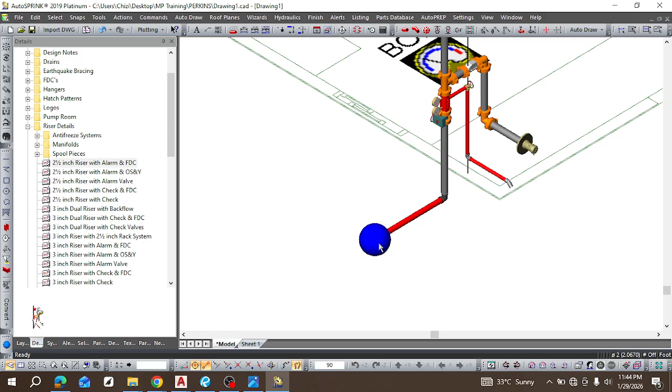Now we add water supply. Now it has an option for water supply. Remember we talked about how water is supplied to the system. So this is how we add it, right? So now we are going to add all the features of that water supply. So we spoke about static pressure, residual pressure, and all of that.

So now let's select values that are going to meet our system. So we had a range. Okay, I don't want to go to that. Okay, let's just go there. Right. Okay, we had a range for each of these. This is what we're looking for. I don't know this. If you can close it.

So for static pressure 50 to 85, residual pressure 25 to 60. This is a small building and it has very small demands, so I'm just going to take values on the lower end. So for static, let's take 50, well, let's take 55 psi. 50 is too low, right? We'll do our calculation and then we'll see whether it works or not. That's the point of the calculation.

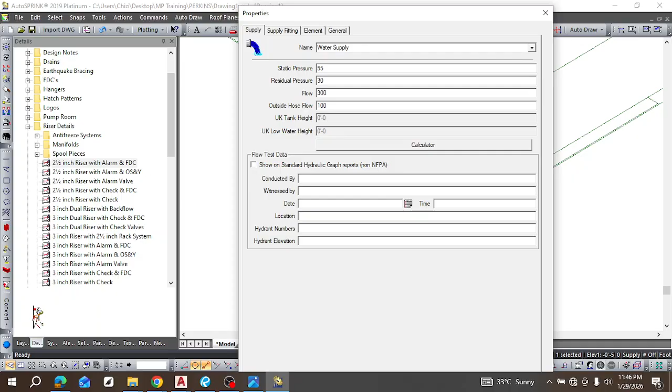For residual pressure, use 30 psi, and then for the flow, we got 225 for that one example, but let me use 300, right? I'm just giving a higher estimate. Then outside hose flow, this is the supplemental flow. We call it 100. So press enter. So now we've given this water supply the necessary values, right?

Now this water supply is going to supply into all the pipes that are connected. Those green snapping points were showing all that time, so they're all connected, and we were able to ensure that we can perform our hydraulic calculations, right? So select the riser. We've done that. Add water supply. Okay, 85 psi, 55, and this is for average values, higher values, but that building is quite small.

Now turn the floor layer back on and draw the most remote area. Remember that design area we spoke about. This is what it meant by that, although in this app it's called remote area. Carefully check the other side does not snap to the wrong levels. So I need it to be drawn on the floor level. So let's do that. Right. Okay. Let's use this.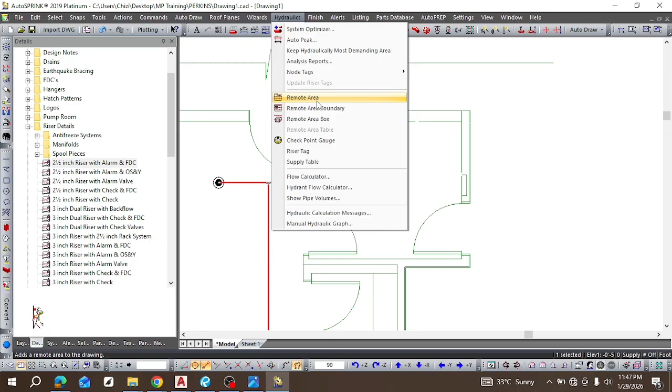So now how we do that is we come here. Let's look at this first. Remember I told you that it's about 1,500 minimum, right? But this building is smaller than 1,500, so we can't really use that. So let's delete it and see what it shows. See, 1,500 feet. We are not going to use that; we are going to use the maximum size of this building. We're going to assume that the whole space is the design area, because it's smaller, right?

The whole point of that 1,500 is that if this size is maybe 2,000 or 3,000, then the 1,500 is maybe this section, the most remote part of the sprinklers, right? We'll just count that 1,500 at this point and take it as our design area. But for this, we're going to take the entire space. So we can draw it ourselves, and we're going to draw it at 0 feet, right?

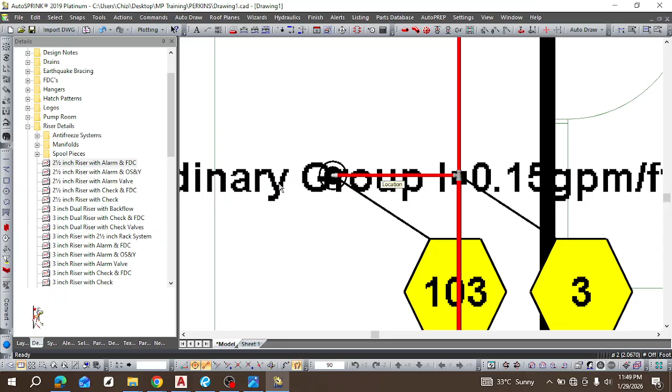So come here, draw it, right? Now it may not be very... okay. Don't forget that this place is the refrigeration, the cold room; we are not drawing for that. Okay, so this is it. They've shown you this floor area is quite small, and they've shown you that ordinary group is the hazard they've assigned to it. It's not up to you to make any changes you want to make, right?

Okay, now when you double click on that area we've drawn, this is where we can select the different hazard types. It is ordinary group 1, so we leave it at that, right?

Okay, and then we also see this is the correct value, right? I mean, already by the time I select ordinary group 1, it's going to change the values accordingly, right? Okay, so that is that.

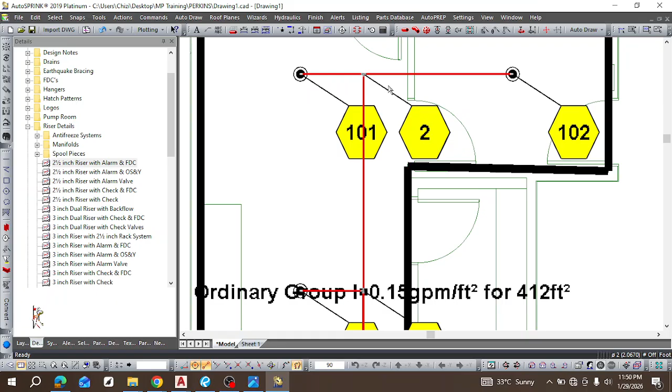Now these values just give us an idea of the pressure levels or the stress levels at each point, and you see that it is usually higher, or it's usually indicated at the points where fittings are. This just goes further to tell us that the fittings can either make or mar your system in terms of maintaining the pressure and flow. Now this is another problem with selecting the whole area. This is why I should not select the whole area, right? Because

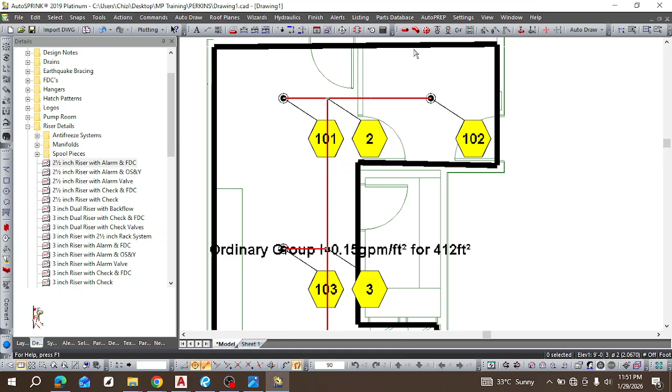What I like to do is that I select just a small section, which is like the design area, and then it gives me an idea of the pressure levels around, or the pressure points, around that point, and then I just rename it and number it accordingly from the beginning, right? So it's 1, 2, 3. This is just to make it presentable, right? Although I'm sure those figures have meanings, as it is, I can't really explain what they mean, if I'll be entirely honest with you. So just do that for all of them, right?

So next, what do we have next on our list? Okay, add water supply, we've done that. Turn the floor layer back on. Oh, we turned it back on too early that time. Now select the correct hazard level, which we've done, and generate a remote area table. We have started going into the calculations now, right? So now to get that remote table, you right click on this and get remote area table, drop it here, right? Now it's giving us values.

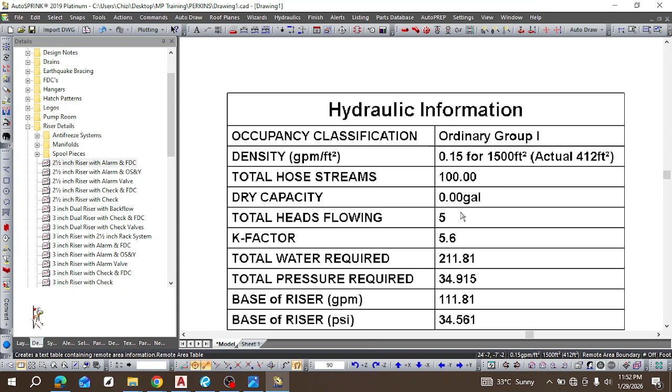Now we've seen the occupancy classification, the density, the total hose streams, which we added as 100. This is that supplemental water supply. Then dry capacity. We don't have any dry pipes in our building. Then total heads. This is number of sprinkler heads, and you see it's 5 of them, right? What again? K factor 5.6. Now let's see how we can adjust these K factors, right?

You right click on this now, or you just simply double click on it. It gives you the features, right? So you see that you can adjust the K factors of the sprinklers and then other details. Now initially, it gives you like a minimum of 5.6 or a standard of 5.6. Now if for any reason your remote table is not giving you a positive value, because this positive value here just indicates that our system is good to go.

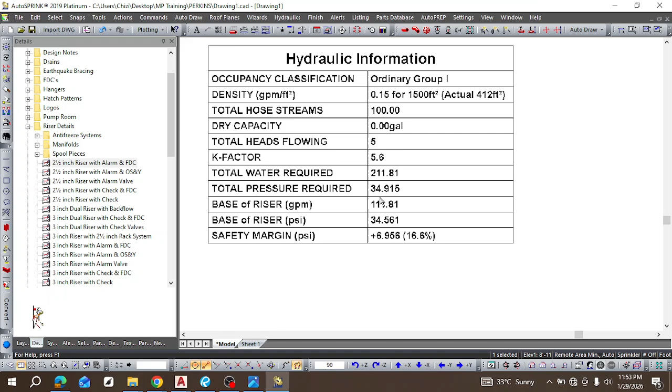Now there are some cases where this value is negative. That means that we need to make changes within our system, like in terms of pressure or flow or K factor, right? And by the time we edit all those things, we're going to get it to be positive. That means now the system passes, right? Okay. So this is the riser we selected. All of these are just automatically generated by the software, and it gives us an idea, right? So this is the K factor. So if we needed to change it, we can change it.

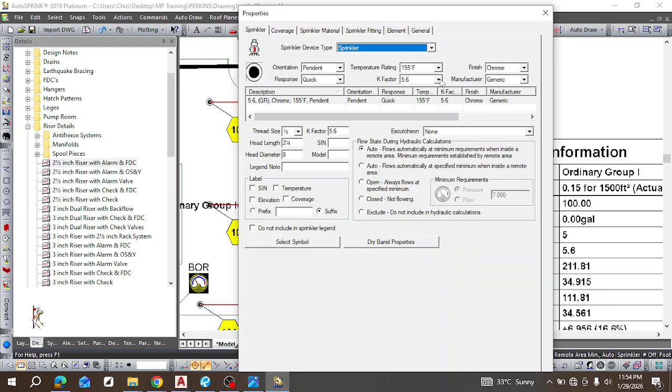Remember that we can have different zones in a building. So this K factor is a perfect way to select different types of sprinklers or different ratings of sprinklers for different spaces, right? So you can select them one after the other. If you want to, you can find the shortcut to select them all at once and change their values. But if you select one after the other, you can make changes. Press enter.

Now if I right click here, let's look at this table: 6.956, 34.561. If I right click here and do that, the table is going to be updated based on what I did there. You see that it has changed, it has dropped. So instead of helping me, that change that I made actually did not help me, right? So all of these things are dependent on the type of the system, right?

So next is to get the reports, right? To print the reports. Now to do that is not difficult, being that we've already got into this, and we're almost done, right? So let's change it back to 5.6. That one is good to understand what changes you make, what effect they can have.

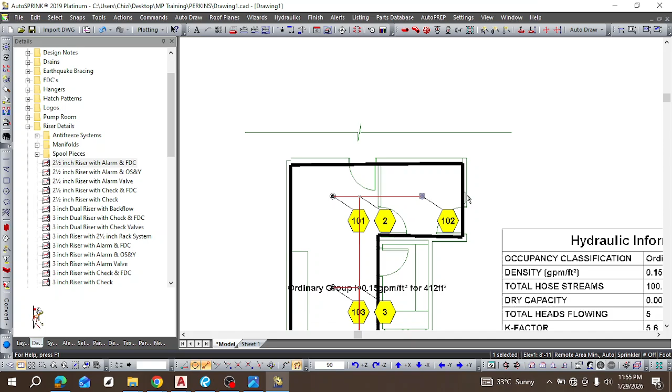Okay, so let me go back to, where is that? Okay, table. Now it has updated again, so back to the way it was. It's now how to get our reports. So we simply select here, and no, it's not here, sorry. So you go to hydraulics. Okay, we need to have selected this. Select this, go to hydraulics, and then is it analysis reports? No analysis reports.

Okay, hydraulic reports. So to get this, now the ones I usually just require, there's a lot of different, I mean, depending on what you're required of, but there are some basic ones I just use, which are listed out here. So hydraulic overview, riser tag, these 5 of them in that order, right? And I arrange them with Bluebeam, right?

So we do this. I mean, we spent so much time already, so let's just quickly. I'll print just once. Hydraulic overview, right? Print just that one, which is already selected. Remove all this one. I just like to print them one after the other, so I can name them properly. So I can preview, but we don't have time. So let's print hydraulic overview.

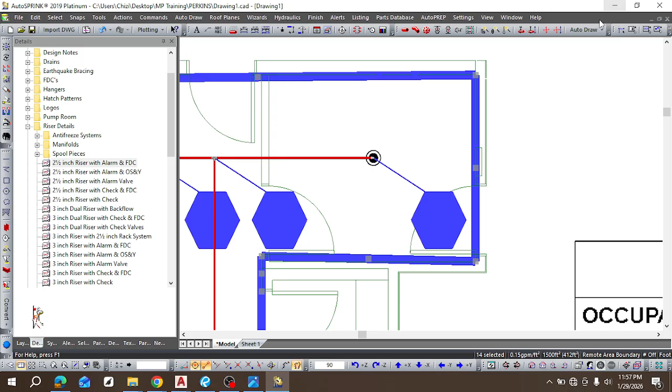So it's preparing the report, right? Oh, I wonder why. Okay, I think it has downloaded. Okay, it does that sometimes. Let's check whether it's really downloaded. So this is what the report looks like. Right, it gives us. Oh, this is bad. This shouldn't be. Well, let's see. Let's go and see if we can change stuff.

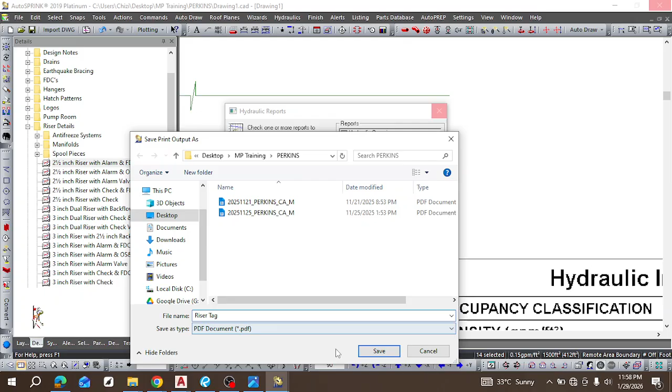Let's try printing something else. Riser tag, for example. Let's print riser tag. Okay, print report. Okay, now it shows us where we can select. This is our original folder. So just write the name I want. Riser tag. Save. And then it does it for me. So that's access denied. I don't really know why it does that.

Okay, this is what it looks like. So it opens it up, gives me a summary of some of the information I have on plan. By the time you print all of the other different reports, you get more information according to what you want. So you do that, and then we bring it back. Now we can export this as a DWG, right? Separate floors, if it's multiple floors, and then export as DWG.

Let's do that fast. Okay, we don't need this anymore. Okay, we need it. Let it be there. This is our ordinary group. Very good. Okay, this is our remote area. So press escape. Now this is our table. So now export. How do we export now? Okay, this was the import. This is to export as an AutoCAD file.

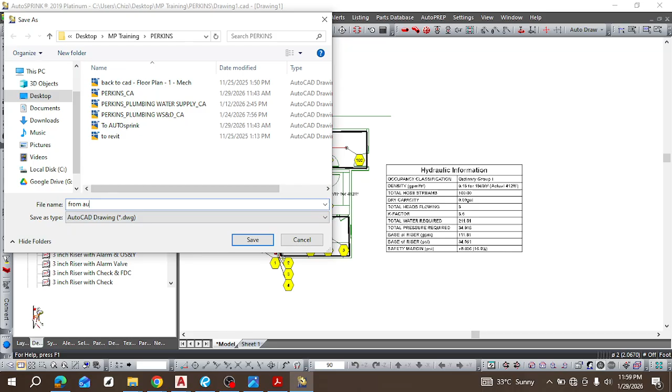So from AutoSprink, right? That's how I'm just naming it. Check if you need to make any changes. And then okay. So it exports it. Okay, it's done. Now I go to my folder. It wants to hang. But we are done, thankfully. Okay, this is my folder. From AutoSprink. Okay, is this it? It's like it didn't work. And this is that riser tag. It brings it out as a PDF, right?

It's like it did not export from AutoSprink. It didn't export, so we'll have to go back and get it. So let's go back to the file that we're using, the AutoSprink file, which is this. Let's export it again. Okay. Now I don't know why it does this, but I can help by doing this. So it changes, removes it. Now let's export once again.

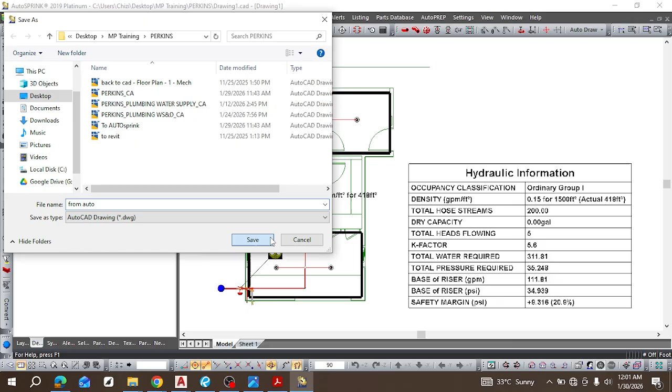To AutoCAD. Okay, perfect. From AutoSprink 2. Okay. Save. Okay. Oh, that's closed again. That is serious. So when it does that.

But basically, once I'm able to do that, I'll just open the file and then I copy out what I need. The layout, I've already done that layout with AutoCAD already, right? But I just need AutoSprink to give it that realistic look of the red pipes and the sprinklers, because it actually shows very realistic rather than just these circles I used here. And then we'll have the table by the side. I don't know why it didn't work today, but maybe by the next class I'll be able to figure it out and it should work by then.